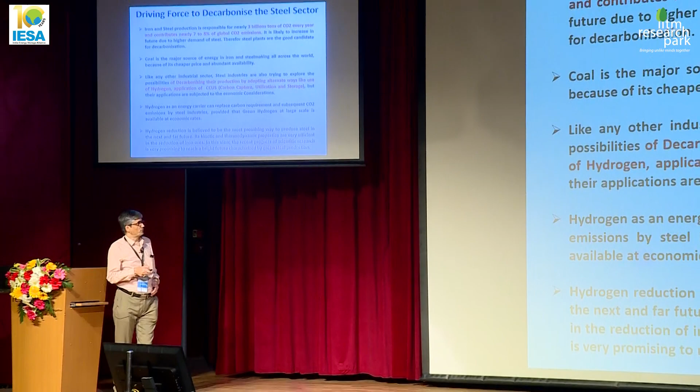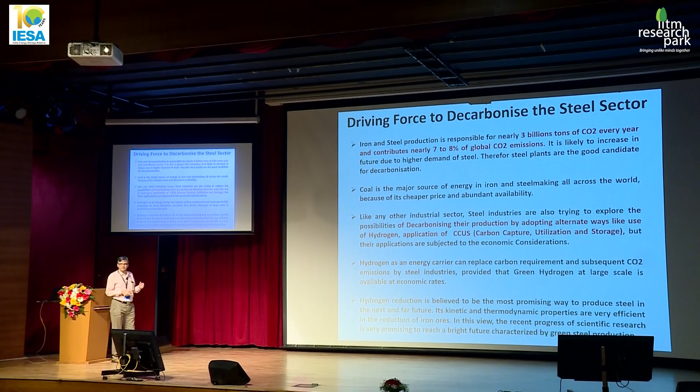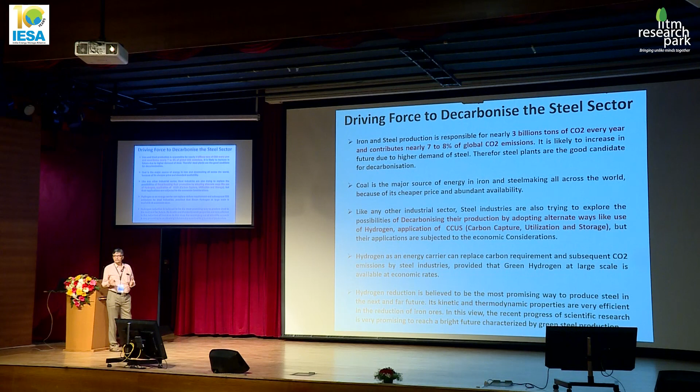So what are the driving forces to decarbonize the steel sector? As we know, the steel sector is responsible for generating a huge volume of carbon dioxide emissions. About 3 billion tons of CO2 every year is generated by the steel sector, which amounts to about 7 to 8% of global CO2 emissions. This will further increase in the coming future because as demand and production of steel increases, especially for India and other developing countries, since steel is a basic engineering material that must be produced in huge quantity to attain the level of a developed country, these emissions are going to increase further.

The second important point is that coal is the major source of energy in iron and steel making across the world. It is not that we should avoid coal because it contains carbon - that's not the reason. It is because coal is at a cheaper price and available in abundant quantity, and as we know, industries run on cost considerations and economic criteria.

Many people here from the steel industry know very well that still today in India, a huge amount of DRI is produced by the rotary kiln approach. In fact, rotary kiln efficiency is lower and emissions are much higher compared to other DRI routes, but still huge amounts of iron are produced this way, consuming almost the same volume of coal. For producing 1 ton of iron, it consumes about 20 gigajoules of energy in the rotary kiln, and it emits huge amounts of carbon dioxide, but it's still being used.

Like any other industrial sector, steel industries are also trying to adopt all possible ways of decarbonizing their production. One alternate approach could be application of CCUS - carbon capture, utilization, and storage. Hydrogen is also one of the useful fuels which can replace carbon in the steel industry as well, provided it is available at a cheaper cost and comes from a source that does not consume carbon.

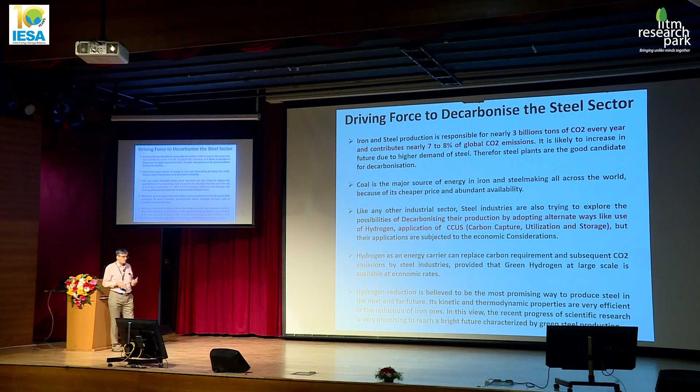As we know, hydrogen reduction is one of the most promising ways to produce steel in the near and far future. Through a lot of scientific research progress, it has been proven that hydrogen offers a better solution, better possibility, and better way of reducing iron oxide from both thermodynamic and kinetic perspectives. If green hydrogen is available in abundant quantity in the coming future, we can decarbonize the steel sector very quickly and easily, as we are talking about for other sectors as well.

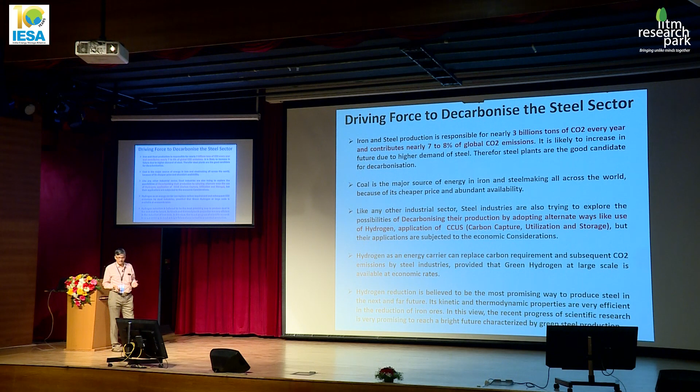I will not talk about this in much detail since my earlier speaker already covered it. There are two possible routes of iron and steel making. One starts from basic raw materials - iron ore, coal, limestone - and another uses recycled scrap. With the basic route, there are two prominent routes of iron making: one involves the smelting process, another involves the DRI route.

One route is through smelting, which involves blast furnace, BOF, secondary steel making, continuous casting, and then rolling mills. Another route involves the DRI route, followed by the electric arc furnace and secondary steel making. In electric arc steel making, it can also consume recycled scrap, and the BOF process can also consume recycled scrap, up to the limitation of heat balance, which could be on the order of 10 to 15%.

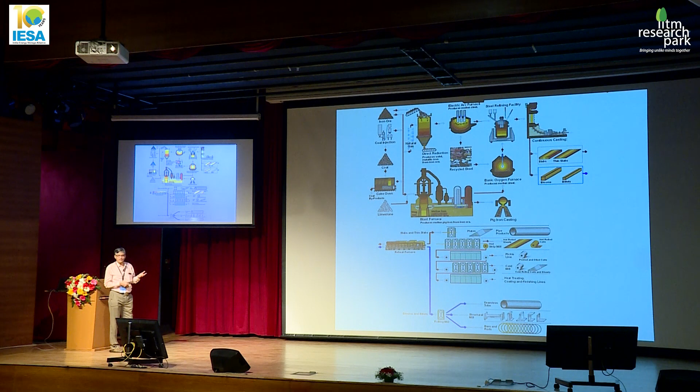If we look at the major steel production pathways across the world, we find that the blast furnace BOF route is still one of the dominating processes, accounting for major CO2 generation by the steel sector. Although in the coming future the secondary route involving electric arc furnace will dominate, that is subject to the availability of scrap as steel production increases further.

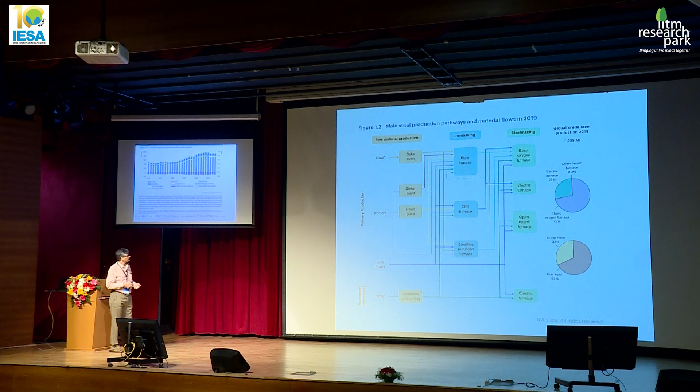Now this is a very important slide. As we can see, the global trend of steel production over the last several years shows that steel production is increasing continuously, and the energy emission, measured in metric tons of oil equivalent, is also increasing over the years.

Although the technologies running in the steel sector have matured over the years - for example, the blast furnace process way back in 1970 had a coke rate of some 900 or 800 kilograms per ton, whereas today the fuel consumption has come down to a level almost running very close to the thermodynamic limitation - the volume and demand is increasing over the years, and is likely to increase further in the future.

So that is also putting a huge challenge on the part of emissions, too much carbon dioxide emission over the years. We need to take care and look for alternate ways of using either non-carbon containing fuels or mitigating the carbon dioxide emissions by adopting alternate means like CCU or CCUS.

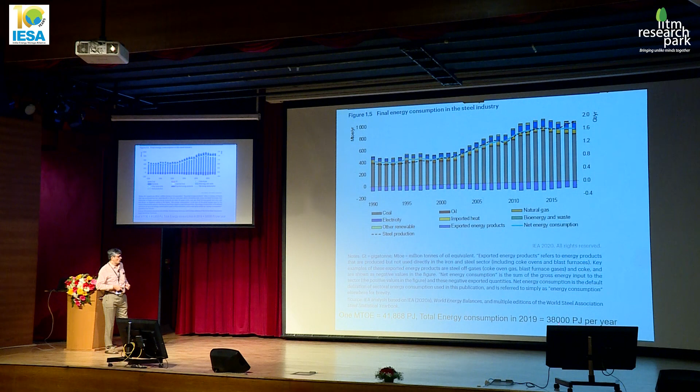Basically, current steel production is of the order of 2 gigaton per year, and current energy consumption is of the order of around 900 million tons of oil equivalent. If you convert it in terms of total energy consumption by the steel sector, it comes to around 40,000 petajoules per year. So what are the key challenges steel industries are facing today?

As our earlier speaker told us, Indian steel industries are facing problems with iron ore on the raw material front. The first and major challenge is depleting resources of quality raw material and their increasing cost. Our Indian iron ore, which is high in alumina, and in the coming future its Fe value is also coming down.

Today, iron ore containing 60 to 61% is considered good iron ore. But in the future, we are bound to produce steel using even very lean quality iron ore, and we need to think about ways and technologies to beneficiate them. Otherwise, we will not be able to sustain such huge demand for production in the future.

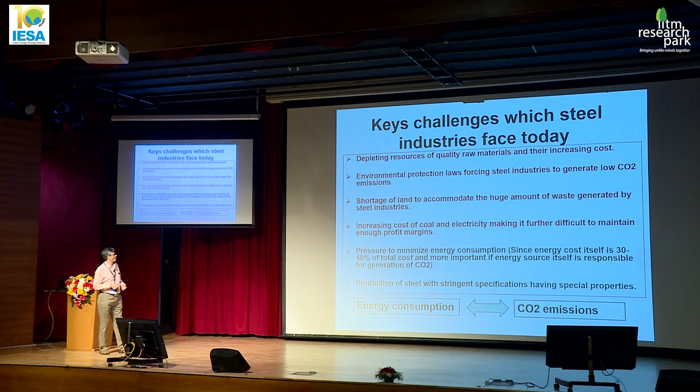Then also, steel industries cannot run by emitting too much volume of carbon dioxide. Also, there is a shortage of land in India because a huge amount of waste is being generated. Unless we think about recycling and utilization of that waste, this sector will not be sustainable.

At the same time, the population of this country is also too large, and there is great demand for land. We need to develop processes or industries that can be accommodated within the shortest available land. Also, over the last several years, the cost of coal and electricity are increasing, and it is very difficult to maintain profit margins in steel industries.

That also prohibits them from applying carbon mitigation efforts. For example, if they want to apply CCS or CCUS, that is going to cost a huge amount of money. Also, if they want to use hydrogen, unless hydrogen is available at a cheaper cost, this cannot work.

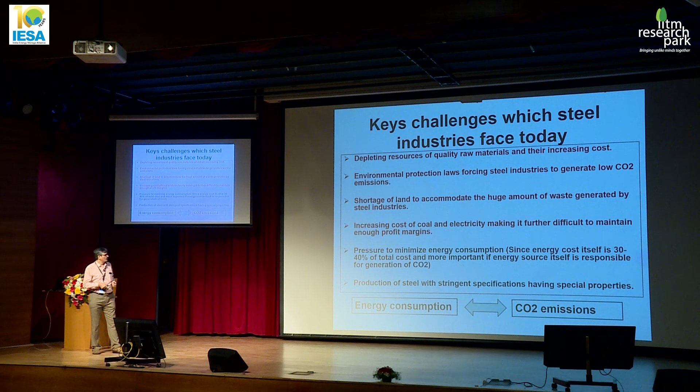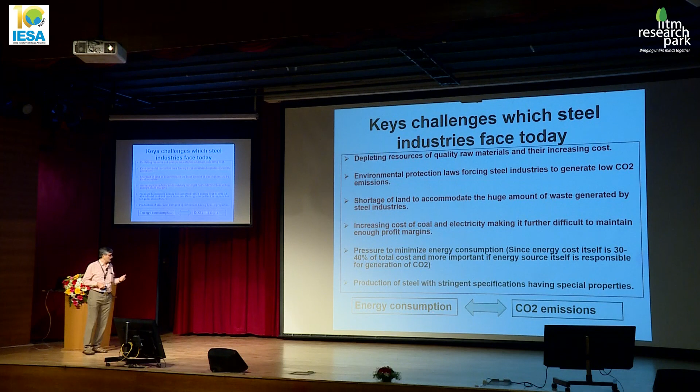So basically, there is pressure to minimize energy consumption by the steel sector, because energy cost is about 30 to 40% of the total cost of production. It is also important that alternate energy sources, for example hydrogen, can replace current fuels only if it is economic and cost effective. At the current time, this energy consumption is directly related to CO2 emissions, because coal is the predominant fuel that the steel sector consumes.

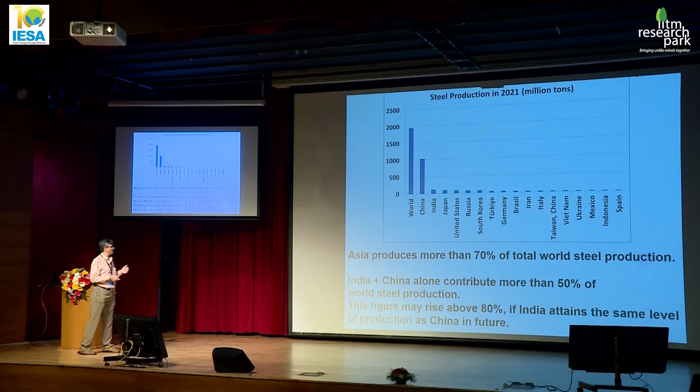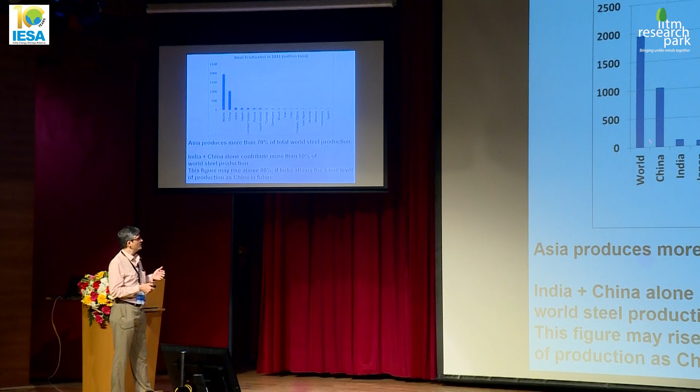If you look at the steel production over the years by various countries, we find that last year, out of total around 2,000 million tons of steel production, more than 50% of the steel is being produced by China. So China and India, basically, they alone contribute more than 50% of the world steel production.

In the coming future, it is projected that India and China combined will be producing about 80% of the steel, because India's production will rise to 500 million ton, 600 million ton by 2040, 2045. And China will almost come down because it has already stagnated at a certain level.

So basically, since more and more steel is supposed to be produced by India and China, whatever efforts on making this sector green, that has to be thought and implemented by these countries only. So this is the relative position of steel production across the world, and as you can see, China and India are the dominant ones as compared to the rest of the world.

Now, if we talk about the energy and CO2 status of the steel industry, as I already told, the steel industry contributes 9% of the global energy consumption and around 8% of the total global CO2 emissions.

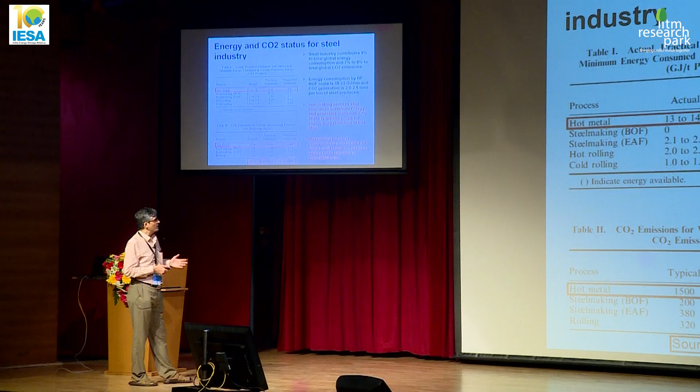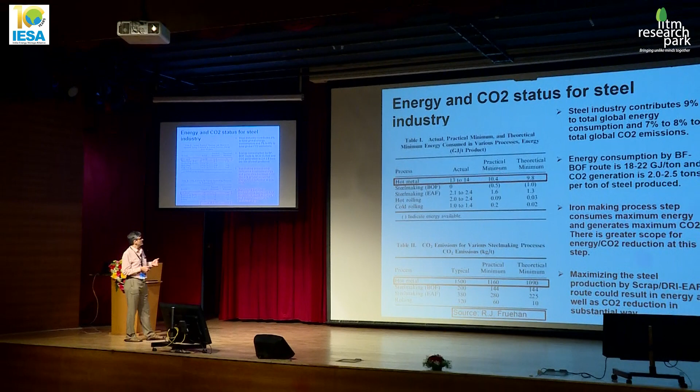These studies were performed by Professor Richard Fruehan some time back, and they calculated benchmark values for various process routes. The theoretical minimum value for hot metal production by the blast furnace route is around 10 gigajoule, and practically it has been achieved down to 10.4 gigajoule.

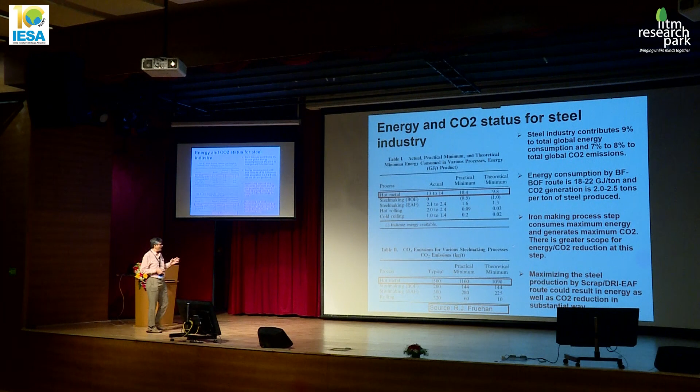So basically, the iron producing step uses the maximum energy and generates the maximum carbon dioxide. That is why there is a greater scope of mitigating CO2 and reducing energy consumption at this iron making stage itself.

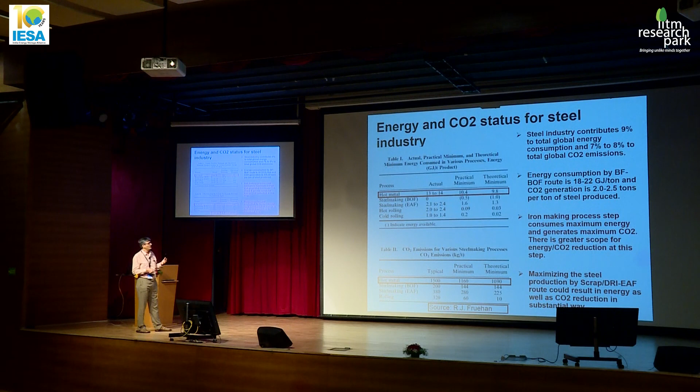Now, what are the decarbonization measures possible by the steel sector? One possibility is the use of hydrogen. But if the hydrogen is coming from a carbon consuming power plant that is already using a lot of coal, then it will not help. So if green hydrogen is available, then that can be used as a replacement for carbon, because the end product is water.

This hydrogen usage has the potential of reducing carbon dioxide emissions by 80%. One way hydrogen can be used is in the DRI shaft furnace in iron making, where it can be replaced up to 100%, whereas in the blast furnace it can be done only to a limited extent.

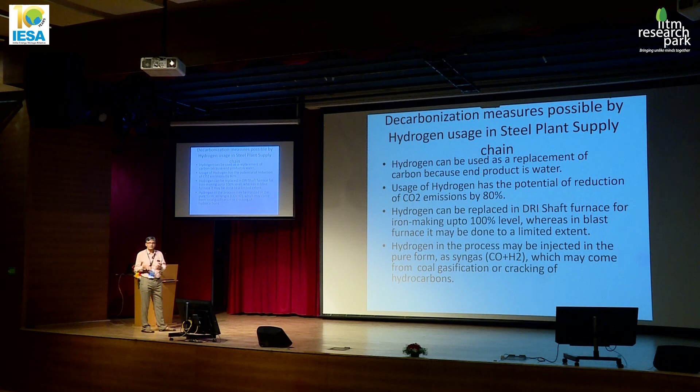Hydrogen can also be generated in the form of syngas, which can come from coal gasification, or from cracking of hydrocarbons or natural gas.

Just a few aspects on the thermodynamics of reduction of iron oxide. Iron oxide reduction is a step-by-step process: first Fe2O3 is reduced to Fe3O4, and it is again reduced to FeO under the combined influence of carbon monoxide and hydrogen.

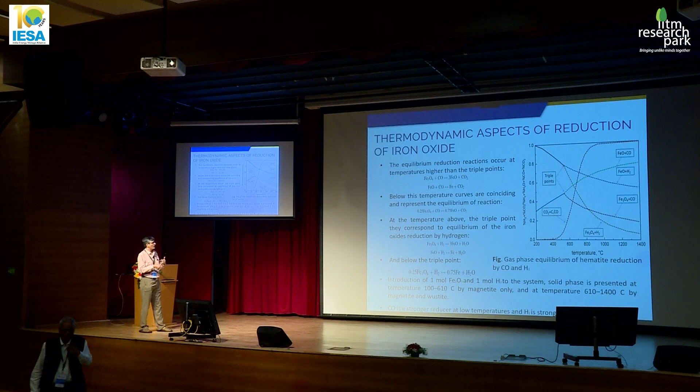This can give you the idea about replacement of hydrogen, or alternate fuel which contains hydrogen, in DRI making and in iron making in general.

So if you look at the kinetics of reduction of iron ore by hydrogen, it basically involves a combination of steps, where one step contributes to mass transfer controlled kinetics, and another step contributes to kinetics controlled by the chemical reaction.

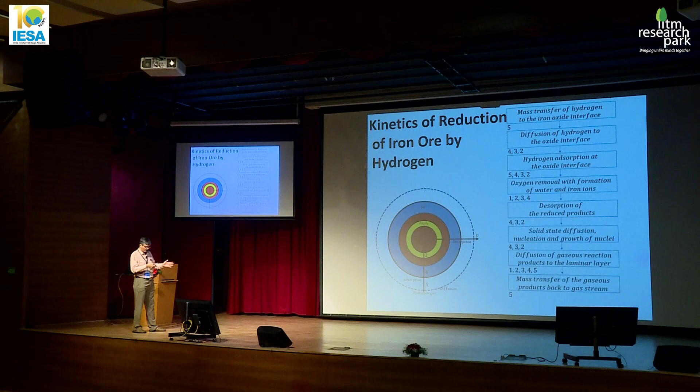So the overall kinetics, in mathematical terms, could be described as a gas-solid reaction which may have coupled diffusion-assisted mass transfer phenomena as well as chemical reaction control.

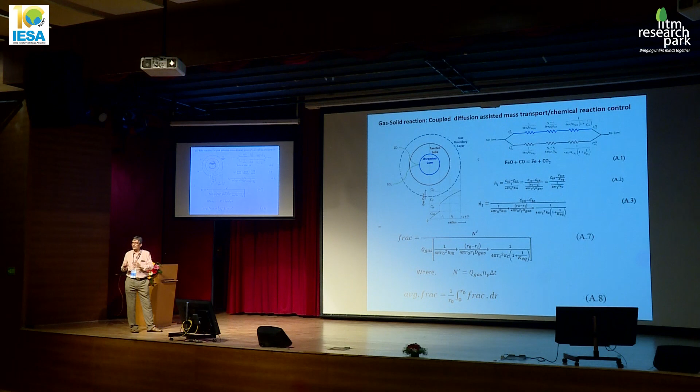All these studies have been performed very rigorously over the last several years, and it is a well-researched topic. As far as hydrogen application in DRI making is concerned, it is also well-researched, and hydrogen can be used up to 100% without difficulty, provided it is available. This is the iron ore reduction kinetics shown at the macroscopic level; at the atomic level too, similar phenomena can be observed. I will quickly move on to come to the point.

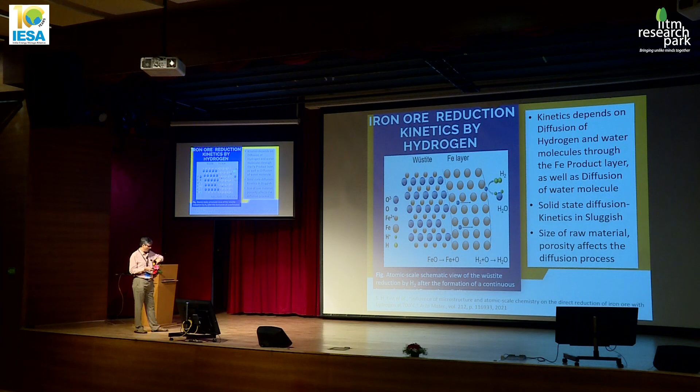So hydrogen can be used in the blast furnace, as our earlier speaker has spoken about some of the efforts underway in Tata Steel.

It's a counter-current reactor where the top portion involves gas-solid reaction and remains in solid form, whereas the bottom portion is a smelting reactor, and the temperature of the process increases going from top to bottom.

At the bottom level, coal gasification or carbon gasification is occurring. Carbon is charged in the form of coke, and coal is converted to coke in separate coke oven furnaces, which is also highly energy intensive.

The overall process, although highly complex and energy intensive, has been running over the years and has achieved a maturity level, where people have mastered the science and art of iron making in the blast furnace. That is why it is still the predominant route of iron making today.

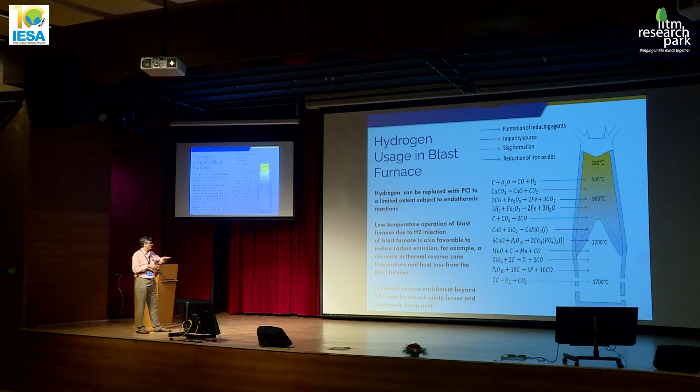One major advantage is that by injecting hydrogen, because it is an endothermic reaction, low temperature operation of the blast furnace is favorable to reduce carbon emission by decreasing the temperature of the thermal reserve zone and heat loss from the blast furnace. This has an indirect effect.

This is a representation of the low temperature operation of the blast furnace due to hydrogen injection, resulting in low carbon emissions. Because of hydrogen injection, about 10% of the endothermic reactions can be replaced by hydrogen injection, and in the thermal reserve zone, reduction of iron oxide by CO will still continue.

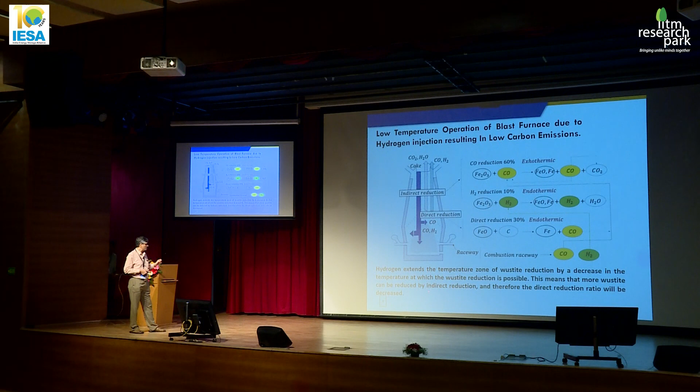But it will continue at a lower temperature, and because of this lower temperature, the utilization efficiency of carbon monoxide will be higher, further reducing carbon dioxide emissions. So the whole idea is that hydrogen extends the temperature zone of the wustite zone by decreasing the temperature at which wustite reduction is possible. This means more wustite can be reduced by indirect reduction, and therefore the direct reduction ratio can be decreased in this process.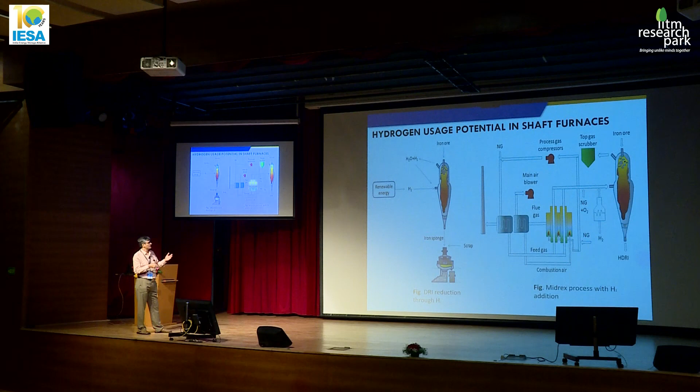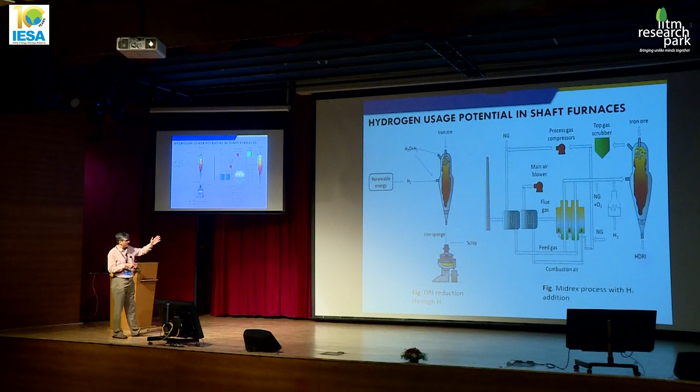Now I'm talking about the possibility of using hydrogen in this Midrex furnace. The Midrex is a well-known and commercially used shaft furnace operation for DRI making across the world. In the Midrex, basically we are using natural gas, which is reformed by using the high temperature waste gas coming from the top of the reactor.

The product is syngas containing carbon monoxide and hydrogen, but the hydrogen in the conventional Midrex process after reformation of natural gas is of the order of 55 to 60%. If another source of hydrogen, or green hydrogen, is available, it can go up to 90% or 100% as well. So this is the technology which is already available, where hydrogen can replace the syngas or natural gas to the 100% level, provided that hydrogen is available at a higher volume. So one of the possibilities is that hydrogen can be used in the Midrex process to the 100% extent.

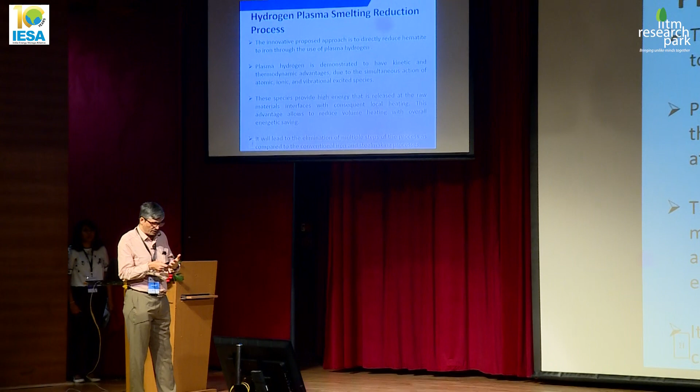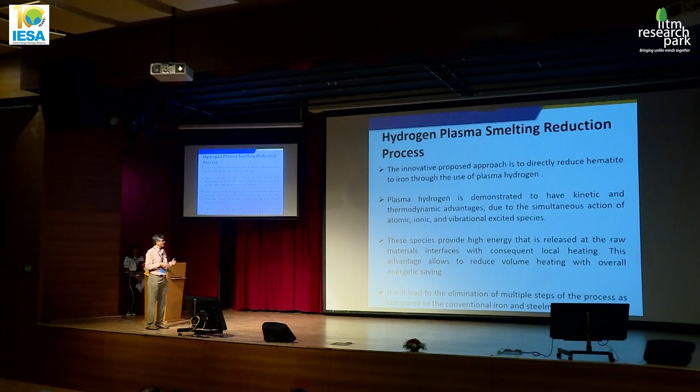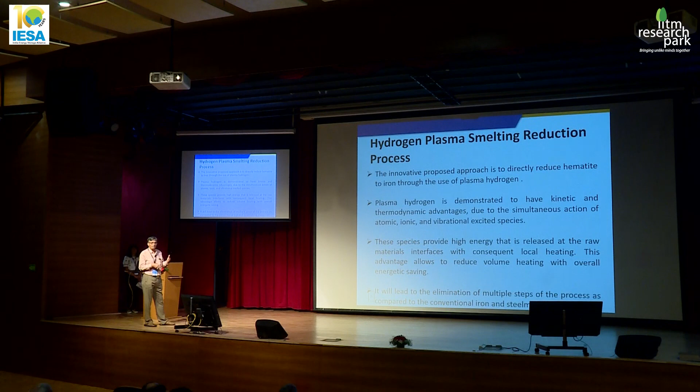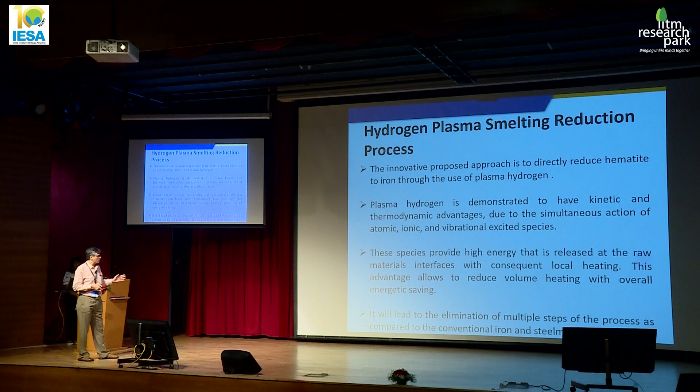Now I'm going to talk about new developments in this area - development of a new technology called hydrogen plasma smelting reduction process. Basically, instead of molecular hydrogen, hydrogen is injected in the plasma form, that is in the ionized state, where the atomic form or ionized state of hydrogen has better kinetics as compared to molecular hydrogen, because there is simultaneous action of atomic, ionic, and vibrationally excited hydrogen participating in the reduction of iron oxide. Another advantage is that this process will be a single-step process, eliminating the multiple steps of the conventional iron and steel making process.

So this is the schematic diagram of the single-step HPSR process, where hydrogen can be used for reduction under plasma, and in a one-step process, the product will be crude steel, which just requires a secondary steel making operation.

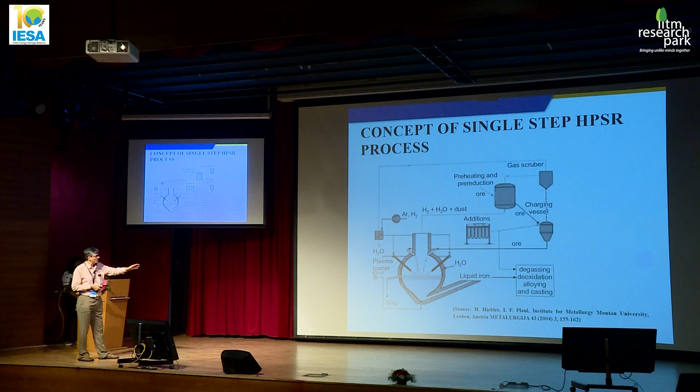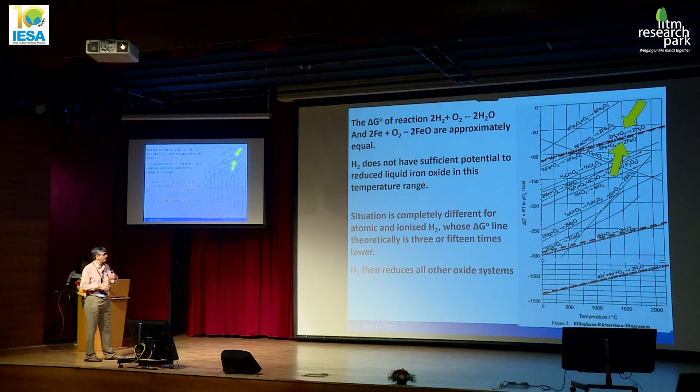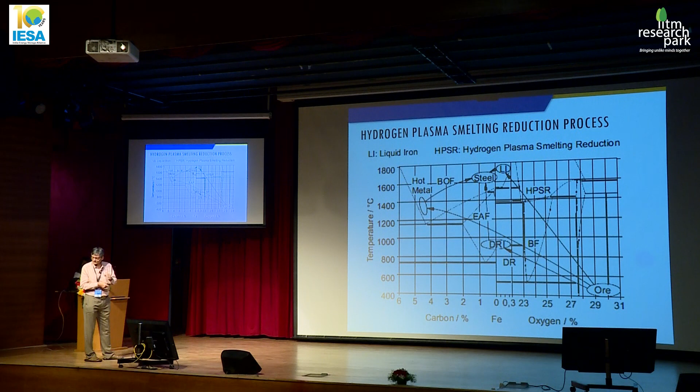We're almost run out of time, so we need to stop now with just one or two quick questions. Okay, can we do that? Okay, anyway, I'll just quickly give two more important slides.

If I compare the hydrogen plasma smelting reduction process, it is free from carbon dioxide emission. It is a single unit production for steel, it is eco-friendly, and iron ore fines can be used. This is the final slide.

I have talked about the possibility of replacing carbon with hydrogen for various process routes. I talked about the blast furnace BOF route - hydrogen can be replaced only to a limited extent, 15% in the conventional blast furnace, subject to oxygen enrichment. If oxygen enrichment can go beyond a certain level, considering safety issues, then we can go higher. Otherwise, only 15% in the conventional blast furnace.

In DRI production, this technology is already available, and hydrogen can be replaced to 100%. In the hydrogen plasma smelting process, which is under development, in India it has been tested to the 10 kilogram level by IMMT Bhubaneswar, and we had also signed an MOU with them to work further in this area. So these are the three possibilities by which hydrogen can replace carbon.

So now, because of the shortage of time, I am just stopping here, but I can have further discussions with all. Thank you very much.